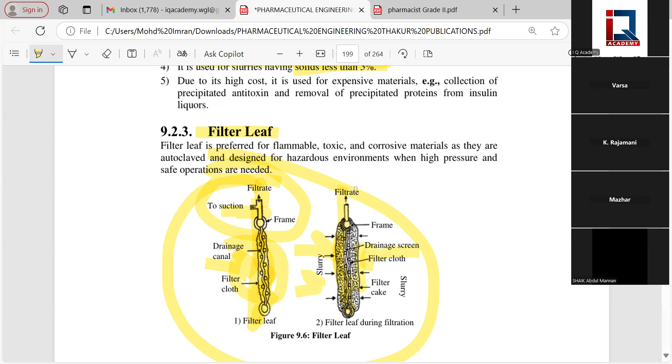This is the suction procedure, this is the filtration area, this is the channel, and you have the filter media around. When you dip it in the liquid to be filtered and apply suction in this area, simply the water will be passing. You can see the water passing from this side.

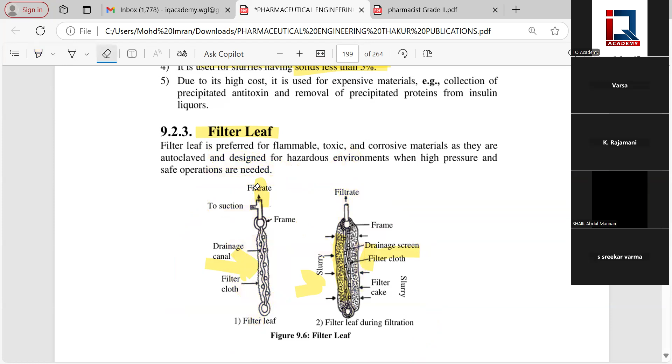Okay, so look at the filter leaf. You can see the construction principle, very simple, very easy and applicable. In future you will see the use of this filter leaf very very often.

Very important: filter leaf is preferred for flammable, toxic, corrosive material as they are autoclaved and designed for hazardous environments. This should be remembered - for flammable, toxic, corrosive material.

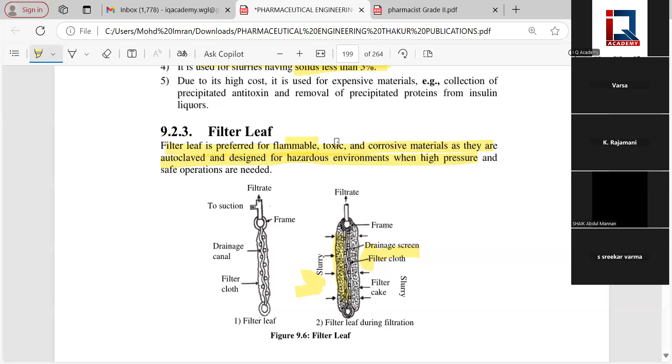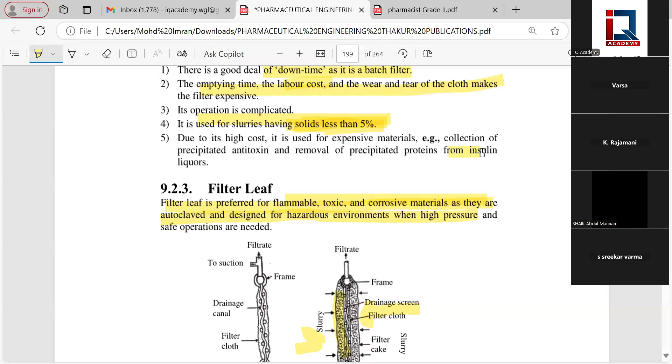Whereas plate and frame filter is used for those substances where the solid is less than 5%, and material like insulin production - this is where we use plate and frame filter. Leaf filter is for corrosive material, hazardous environmental material and other materials.

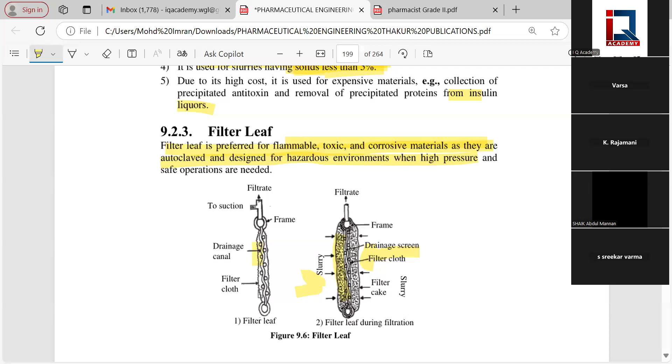So the principle is very simple and is surface filtration. Principle involved is surface filtration. Filter leaf consists of a longitudinal drainage screening covered with a filter cloth - this filter cloth is covered with the longitudinal drainage screening, which functions to strain the filter.

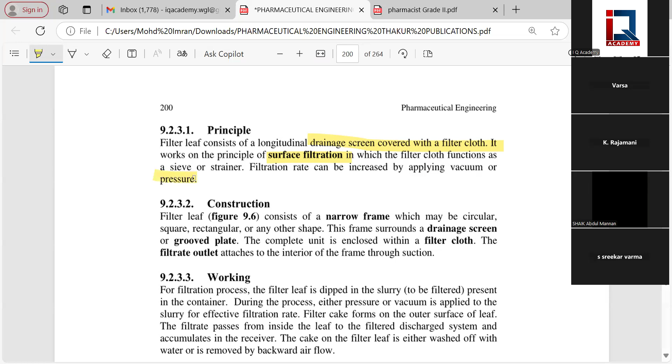Filtration rate can be increased by applying vacuum and pressure - we discussed pressure has a direct relationship. Construction is very simple. It's in the form of a leaf, consisting of a narrow frame with a circular, square, rectangular, or any other shape.

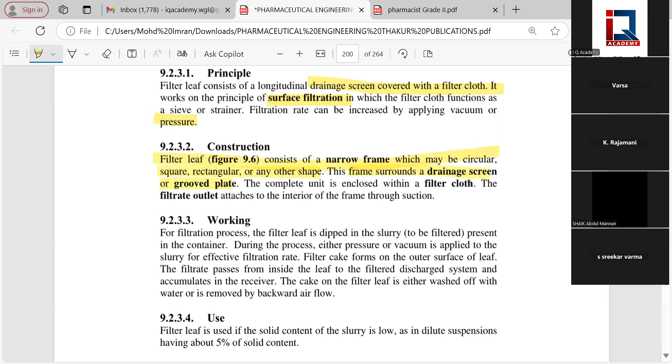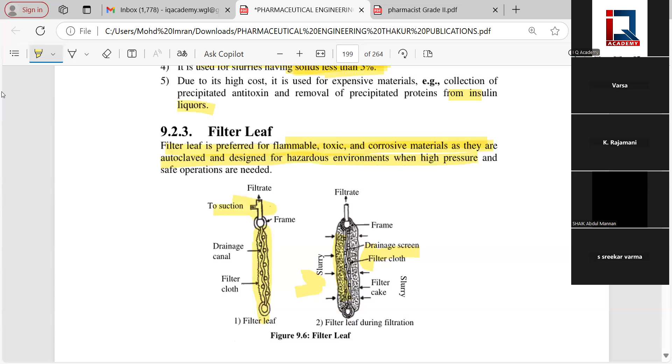This frame surrounds the drainage screen or the grooved plate. The complete unit is enclosed with a filtration cloth. For the working of the filtration process, simply dip into the medium to be filtered and apply the suction. This is very important, right?

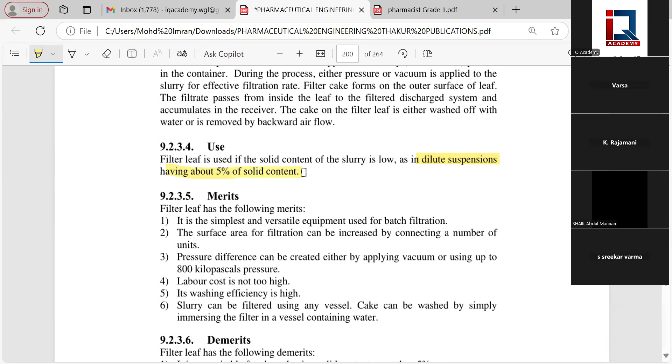Next, the uses: filter leaf is used for solids containing slurry, as in dilute suspensions having about 5% of the solid content. Demerits: it's a batch process, cake will form, and solid content above 5% won't work. Then there's drum filter and other types.

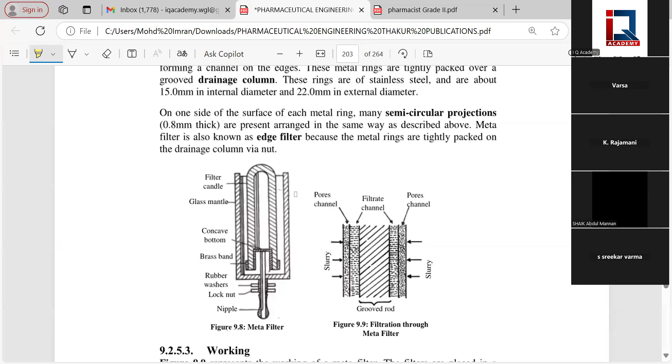We will jump to the very important meta filter. This is the meta filter. You can see the construction here. You have screw-like grooved plates. These are filtration channels, with different pore channels, and slurries entering like this.

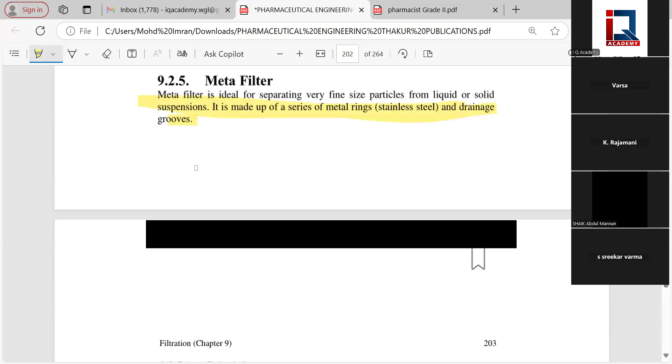The principle again is surface filtration, that's sufficient. Look into the construction: metafilter consists of a series of metal rings - one ring on top of another ring, carefully placed close together. My diagrams are not very good, so try to understand it.

Linearly from the channels on the groove, these metal rings are tightly packed over the drainage column. These rings are made of stainless steel and are about 15 mm in internal diameter and 22 mm in external diameter. Please note down these dimensions.

Sir, please note down the dimensions. Look here, this is important, that's why I'm focusing on this. 15 mm internal diameter, 22 mm external diameter.

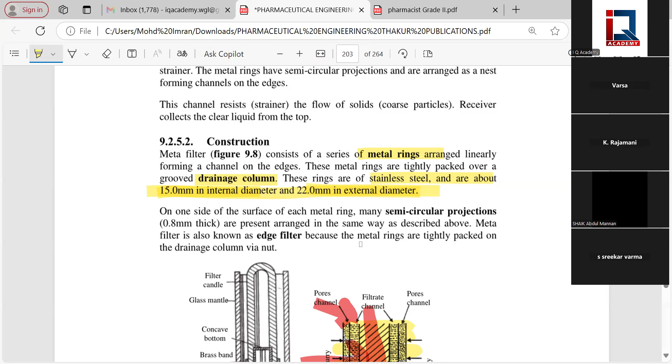On one side of the surface, each metal ring may contain many semicircular projections only, that is 0.8 mm thickness. Semicircular projections, 0.8 mm thickness. So note down these things, very important.

They are arranged in the same way as described above. Metafilters are also known as edge filters. Working is very simple - the filters are placed in the vessel and operated by propelling the slurry under pressure, or sometimes by applying reduced pressure and vacuum. Slurry is allowed to pass through channels formed due to the grooves in the rings.

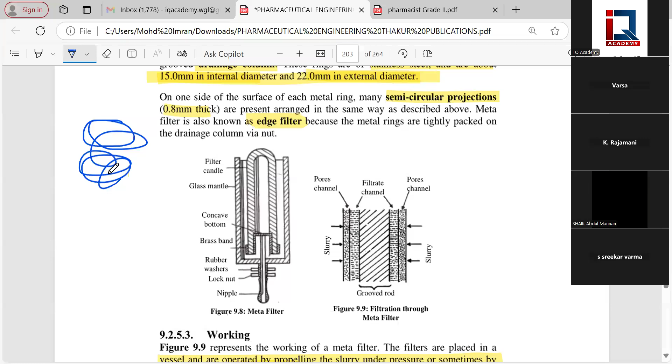Let me explain again simply. In meta filters you are using a series of rings, so these small rings are arranged one after the other. By arranging the rings like this, grooves are formed - 0.8 mm thick grooves are formed. In that, the material is being filtered - meta filters.

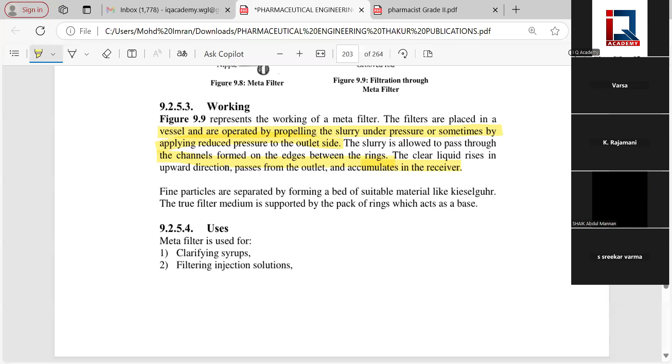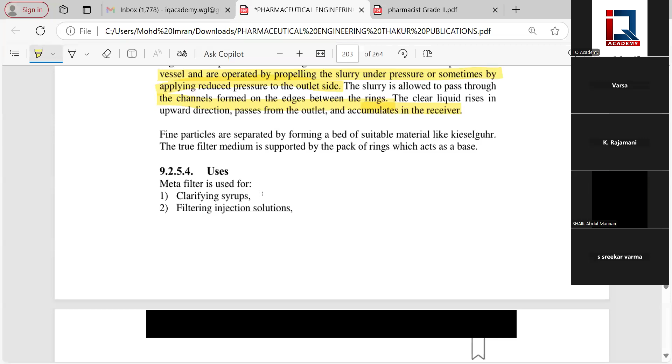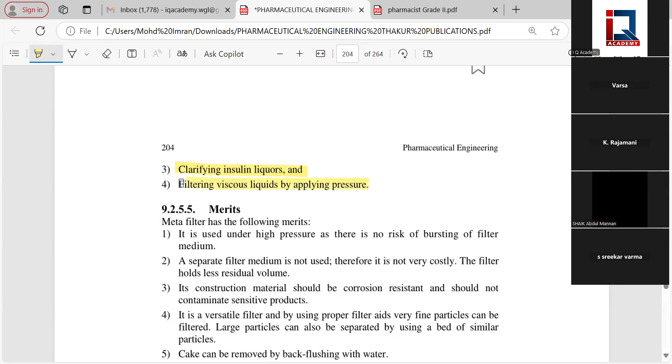But there are uses also: clarification of syrups, filtration of injection solutions, insulin preparation, clarification and purification, filtration of insulin, and filtration of highly viscous substances. So meta filters are very useful.

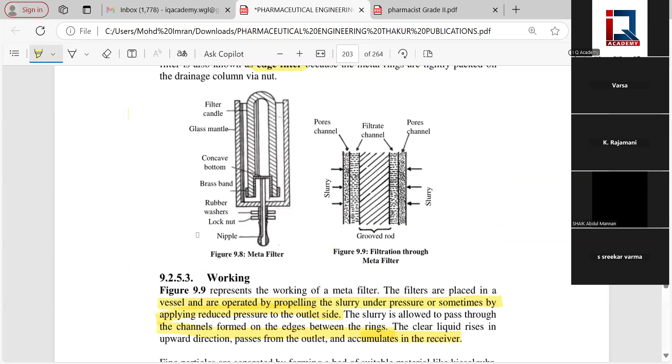Okay, so in meta filters what you need to remember is the dimensions: 15 mm internal diameter, 22 mm external diameter, metal rings arranged in sequence - remember this. Semicircular projections, 0.8 mm thickness - remember this. They are also called edge filters. Remember they are used for highly viscous material.

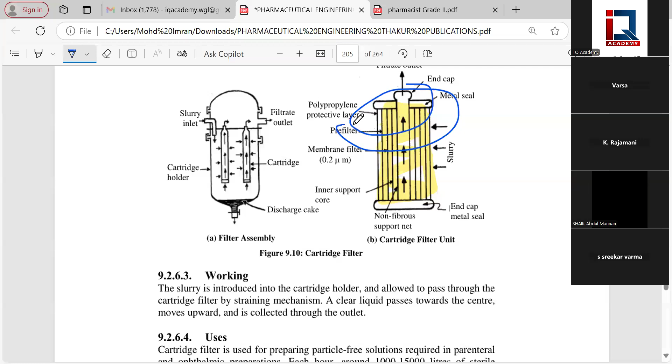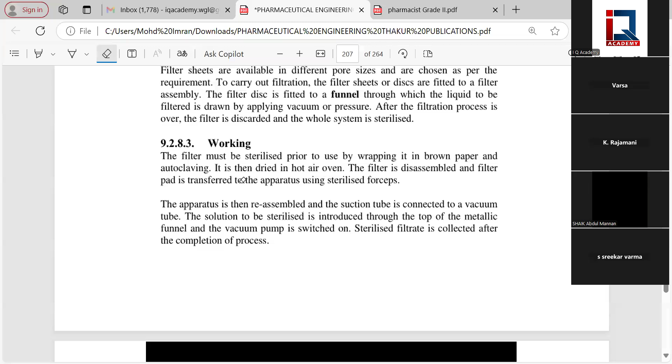And you will have the membrane filters. Seitz filters also there - we will discuss these three filters in the next class, because filter equipment are very important. We need to focus a lot on it.

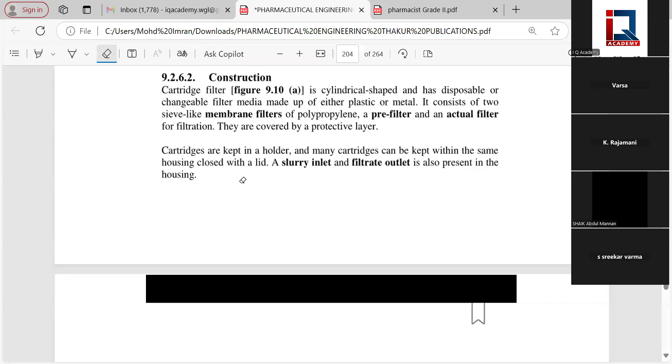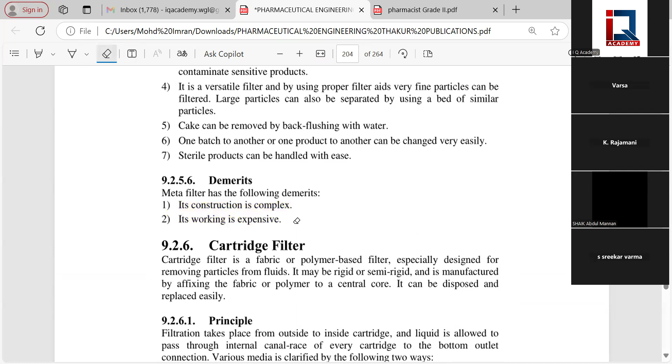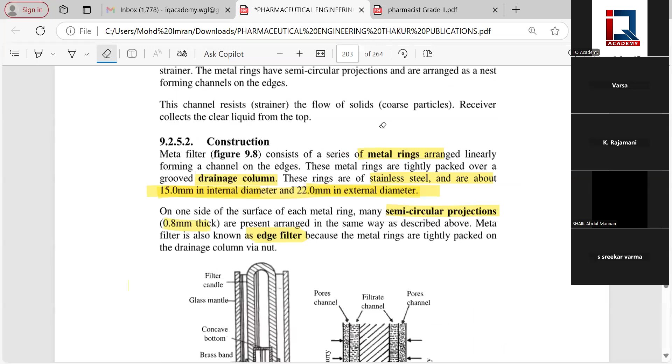Okay, so that's all for today. So today we discussed objectives of filtration, factors affecting filtration, plate and frame filter, and leaf filter - okay, and meta filter, three equipments. That's for the meta filter. Next class we'll discuss cartridge filters, Seitz filters, membrane filters.

Okay sir. Try to focus with one more topic, that is extraction and sterilization. We are going to complete the evaporation unit operations - very very important. Once that's done, the boring topics will be finished.

Next we have the interesting prescription - parts, errors, handling, very important, and incompatibilities. Then we have posology, some calculation parts, and in exams 2-3 easy questions come from that. We have different calculations - I don't want anybody to miss this: proof spirit, alligation calculations, isotonic calculations, displacement value calculations, very very important.